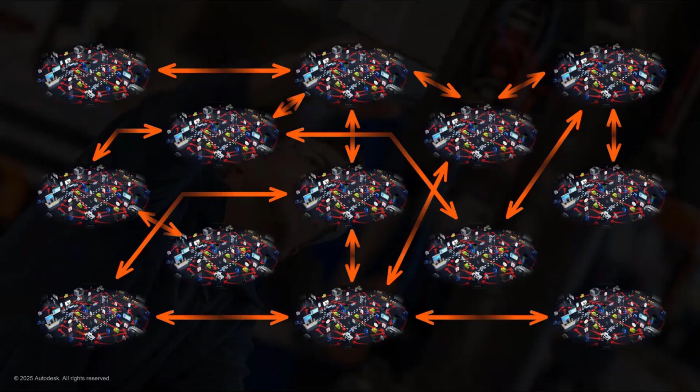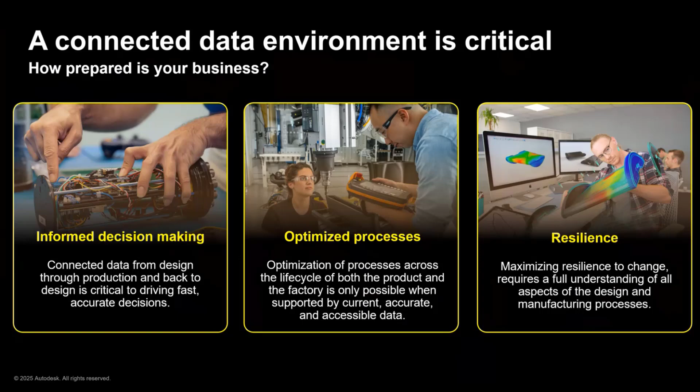We need access to current organized data so that we can connect activity across product design. Connected data will drive collaboration, visibility, and good decision making. Without connected data, we can't make the best decisions.

So now we go to the solution, the Autodesk solution on connected design and manufacturing. The goal here is to improve collaboration between teams by reducing development time, eliminating errors, making manufacturing more efficient, increasing flexibility, and making better decisions and improving collaboration.

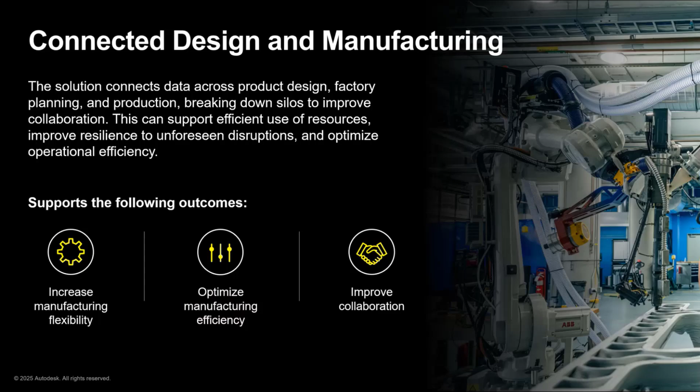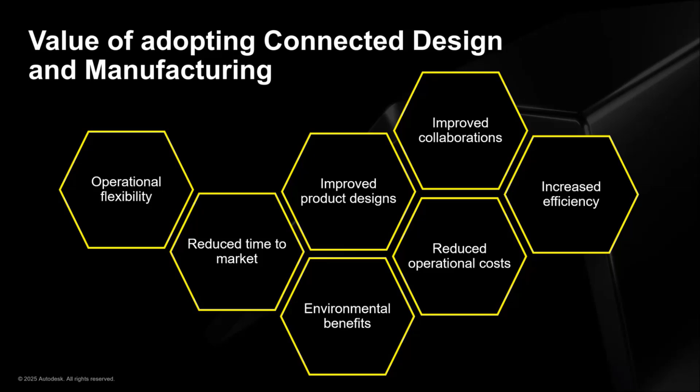Summary on the value of connected design and manufacturing: operational flexibility, reduced time to market, improved product designs, environmental benefit, reduced operational costs, and increased efficiency. Now this is where we get into the more detailed stuff.

So the stages of connected design and manufacturing, as you can see here, let me add a pen. Okay, so the first one here is design data management, this is where we manage our design data, drawings, 2D drawings, 3D models, whatever.

Excel, PDF, this all falls in here - design data. After all our internal things are settled, we already collaborate and manage properly, then we go to the next stage.

This is where collaboration with external stakeholders comes in. For example, you have your own contractor to do all the engineering services, productions, machinists. So how do you collaborate with them? This is the next stage.

Change management for design data - there are multiple scenarios. One scenario is all in-house, so you can manage it on premise. But if it's all scattered location, you probably need to utilize cloud nowadays.

Manufacturing data management, shop floor connectivity - how do you connect from design to shop floor nowadays? In Malaysia especially, the shop floor and the design are usually disconnected. Some of the shop floors I know don't even have internet access, only intranet.

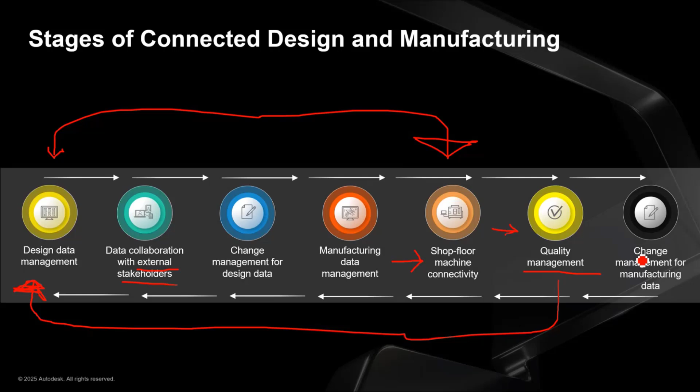And then how do you manage the quality? Let's say there are some defects on the designs - how do we reflect that back in the design data management? If there's no data management, how will it go back to inform that there need to be some changes or amendment on the design data? This also applies to change management for manufacturing data and so on.

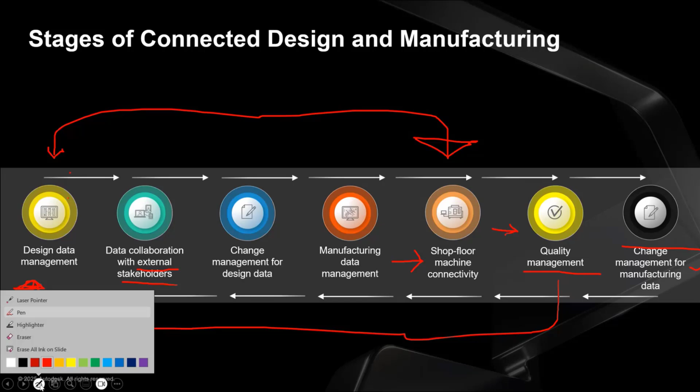Okay. Yes, because here it is all in. Okay.

So the reason why we need connected data is that 80% of business data is never used or never reused, because we don't have the ability to reuse it effectively. If we cannot reuse it, we will have duplicate efforts, outdated design, mistakes in planning execution, and keep repeating this with a lot of errors.

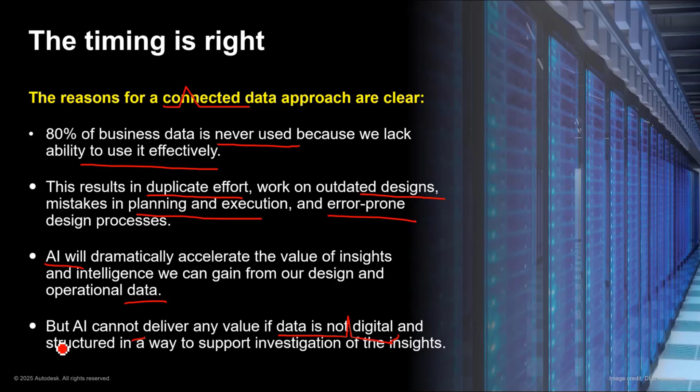AI will help, but AI still depends a lot on data as well. AI cannot deliver any value if data is not digital and structured. So nowadays people are talking about AI, but if your data is not accurate, not updated, or not connected, then AI will not be able to help you to be more productive.

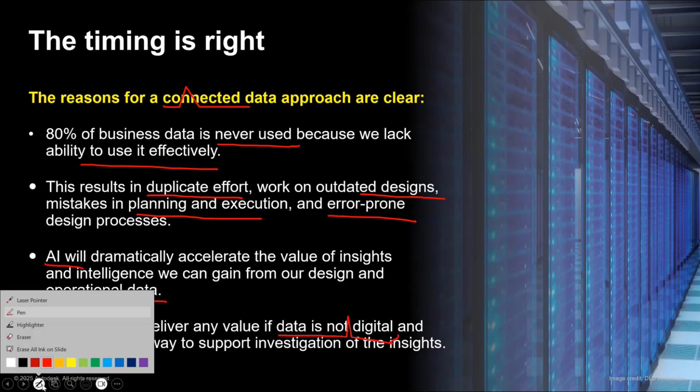So what Autodesk can help with is to connect data, to connect the teams internal and external, and to connect workflows - like from design to engineering to production, maybe to purchasing and all - connecting all these workflows across different teams.

The technology landscape that Autodesk in manufacturing can help with has five solutions. If you're looking at something related to MES or manufacturing execution system, we can look at Fusion Operations. If we're looking at PDM or data management, to collaborate and do minor reviews, we can look into Fusion Team.

If we want to focus more on product life cycle management, this is where things like new product improvements or new product introductions (NPI) fall under. Product data management runs on-premise but with the capability to connect to all the above, which is on the cloud. Vault is the only so-called on-prem solution here, which doesn't run on cloud - it runs on a local server, but with the capability to be configured to connect to cloud if you need to collaborate with external stakeholders.

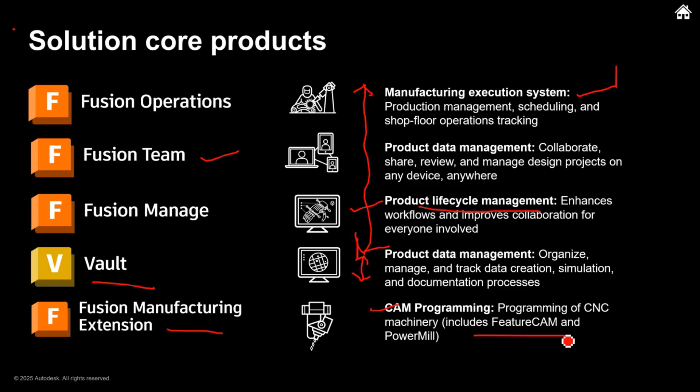Fusion Manufacturing Extension is for CAM programming of CNC and so on. When we put it into the landscape for PLM, we have engineering, Inventor, even AutoCAD is also here - just the logo isn't shown. Let me draw that for you.

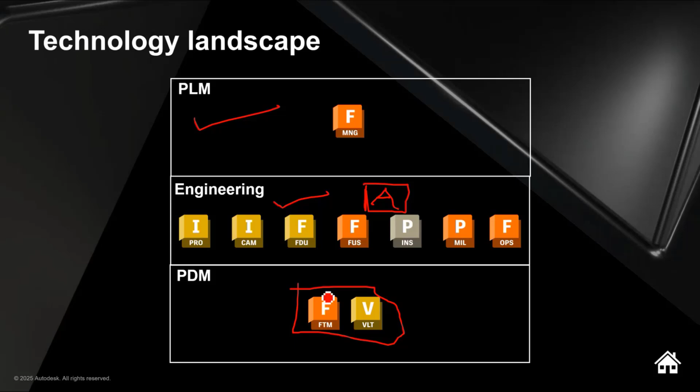Inventor Pro, CAM, factory design utilities, PowerInspect, PowerMill and so on - this is all PDM and PDM related. This covers the technology landscape, stages, and workflow.

Now let's look back at the stages. On the earlier slide, we talked about stages - design, data management - so data stored on network, facilitating enhanced collaboration capabilities.

Why does it need to be on network? So that it's accessible to everyone. It also supports version control and traceability between design and manufacturing data files. Version control is very important.

Imagine now I'm doing the design files, make some edits, save it - probably it's version 4. My colleague opens it up after that, makes some changes, and saves it again - now it becomes version 5. Tomorrow it probably becomes version 6, 7, 8, 9, and so on. Imagine we need to go back to an older version, like version 3 that I created maybe a few days ago.

So here we can go back to whatever versions that we wanted because we can track back. All the metadata of the changes are stored in the PDM data, in this case on Vault.

Automate version control and change requests. Nowadays, if you need some changes and want to ask your team members to do them, what's the method? WhatsApp them: 'Hello engineer, can you extend the bolt to 4mm, add some new holes?' WhatsApp, emails. But with PDM data management, all that can be done from within the platform and it's trackable. You can assign to who, you can set the due dates and so on.

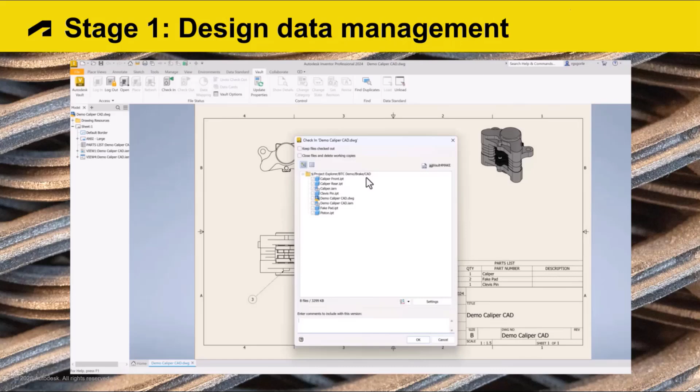Okay, so now let's look at some example. This is on Inventor, but it can also be done on AutoCAD. So let's say we have some CAD drawings opened on Inventor. Let's say initial load to Vault.

So on this platform, I want to load it to Vault, keep it in Vault. Okay, so now I have this. This is a separate, another file, also loading it to Vault.

It can be done simultaneously, all simultaneously. So now you can see here, this is where you can see already released state. You can see revisions, and there are also versions.

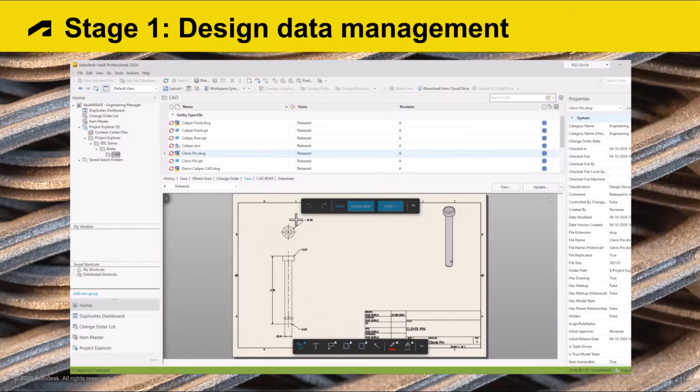So now let's say after the drawings or design has been in release state, in this example probably released to manufacturing, then we realize there are some changes or something need to be amended. Let's say the measurements need to change to a different size, make it bigger a little bit. We give some markups, dimension change, but remember the file earlier has been released to manufacturing, meaning it already has its revisions.

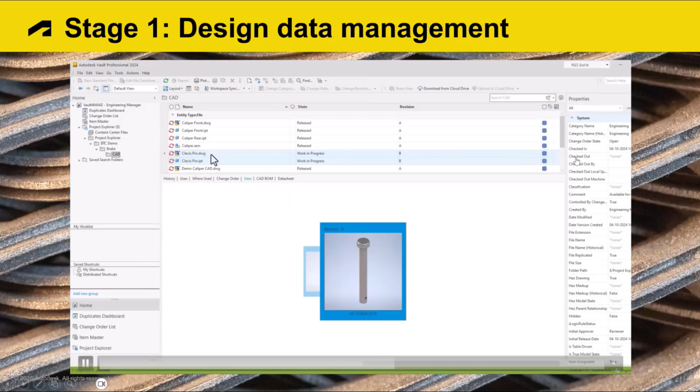So now I'm creating a change order because the file has been released. I'm asking somebody to make the changes. So from revision A, now it becomes revision B because there are already requests to change things after it's been released.

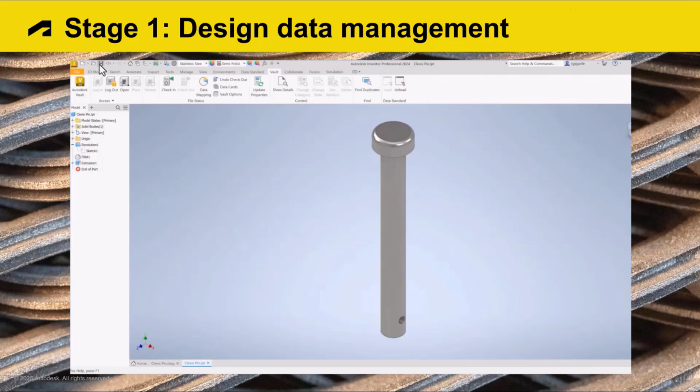So let's say now I make some changes to the models, change the length as requested. Let's say go back, make some changes. After I make the changes according to the markup notes, I just need to save it back or check in that file again into the platform.

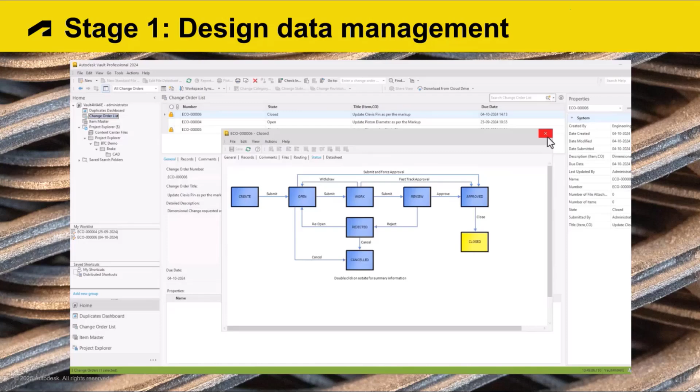Now I go back to the ECO or change order and I can resubmit, and then maybe comment that this is done, the changes are done. So all that is trackable.

Next, when we talk about data collaboration with external stakeholders, this will enable automatic sharing of the current file. So only the current file will be shared, unless we specify older versions or some versions that we wanted to. We can control what we can share, and what the receiver can do—will they be able to edit, or only view?

Okay, so example here. Again, on the platform, this is Vault platform. Let's say I can click share view, of the demo caliper revision A. I can create a name or just rename it 'external sharings'. Once I click share, it will give me a shareable link that I can share to people.

I can view in browser, so the receiver can later copy that link and view it in an internet browser—your favorite Safari, Google Chrome, or Microsoft Edge. You can use it to view the design. By default, the expiry date of that shared view is 7 days, but it is extendable, so you can extend it.

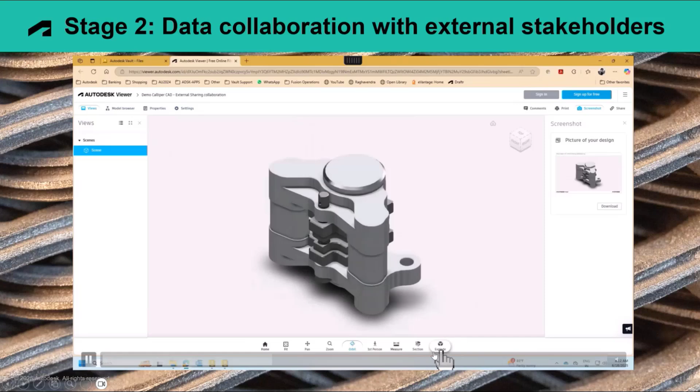Now you can see this is an internet browser, I believe this is Edge. You can see you can view the models in the browser, with all the properties settings. At the bottom, you'll be able to explode the assemblies. Let's say I want to explode that brake caliper to see what's inside—I can do that. I can measure, mark up, zoom in, zoom out, and so on.

And the receiver will not have access to the original files unless you want to send them. So, even though this is on-prem, we can also share it externally. We can depend on email, so we can send that file over via email, or we can send it via cloud.

So in this case, I'm attaching it to an email. You can see the files all sent to emails. Put the receiver details, and it will be sent over, and it will be tracked as well, so the detail of who it's shared to will be available. So this is another platform where we can use Fusion also to share.

So if this is like a joint project, there are people who are not in your office, at different locations, contractors, so they can connect to our design via cloud. We can assign whatever data, file, or project that can only be seen by them, so they can only see very limited or restricted data or project, things that we as the owner allow them to see.

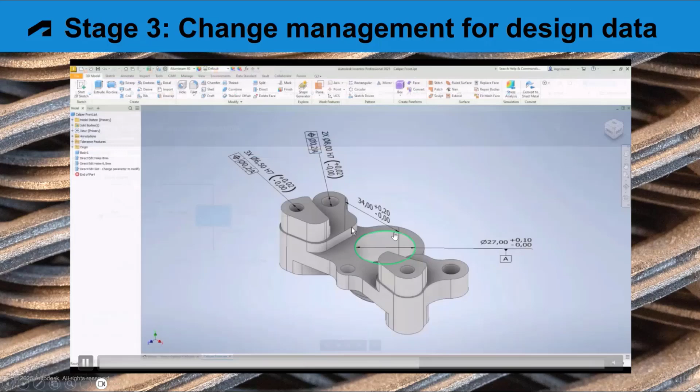So from the dashboard we can see the outstanding work. Let's say it has been assigned, and after the amendment is done, we can clear that assignment.

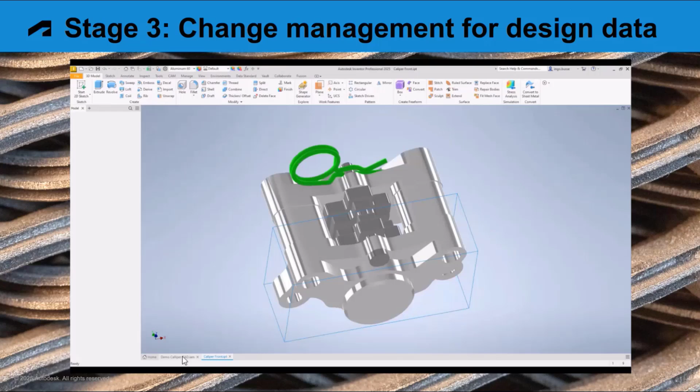So in this case, check if the parameter exists in Inventor, how much effort is needed, how fast the work could be done, how fast the amendment can be done. The assignee who received the task needs to go and check the models to see if the parameter is there, and how long the changes will take. The parameter is correct, offset slot. Let's say I want to comment, all possible within an estimate of 2 hours, for example. So we can respond back to the change order request. That's on change order.

So for manufacturing data management, we can connect Vault to all the CAM applications that we have. For Autodesk, it can connect to PowerMill, FeatureCAM.

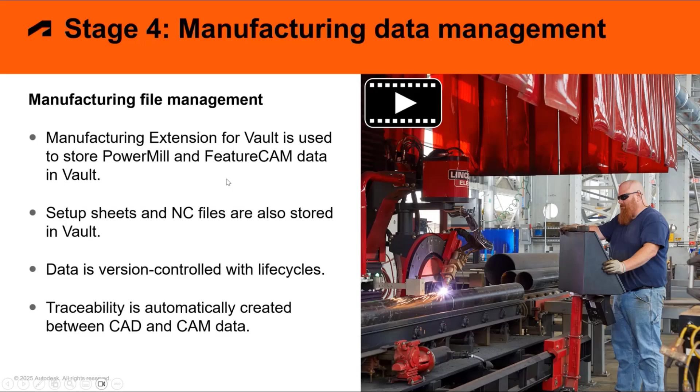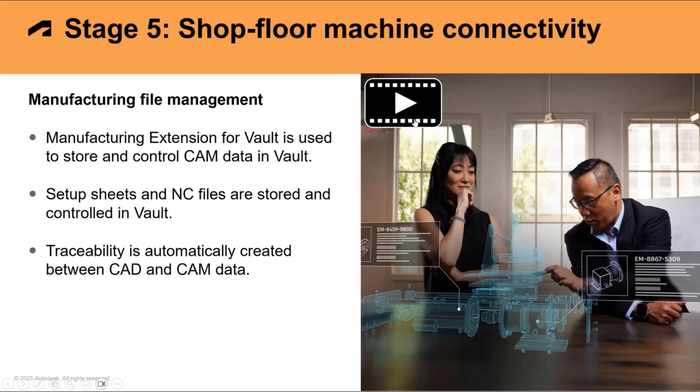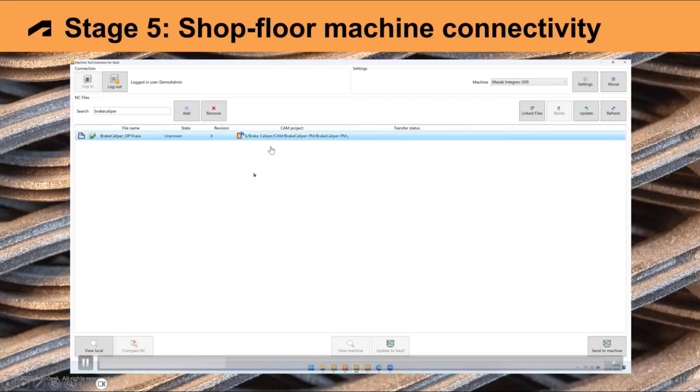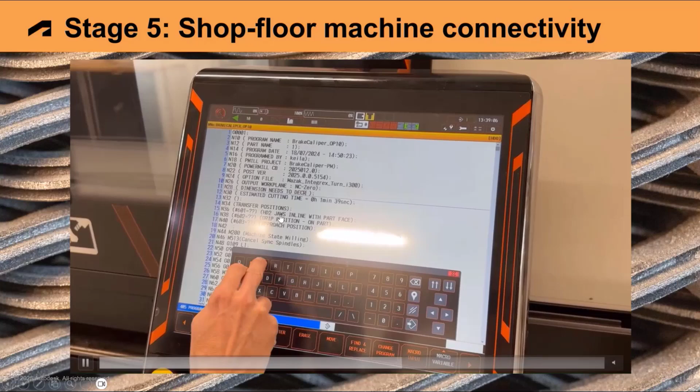From Vault shop floor connectivity, we can also control and view the shop floor information from within Vault. Let's say for brake calipers, I'll fast forward this a bit. So let's say I assign some information, and we know that the NC file exists. From the machine, we can connect to our data management to see what is the NC file, what is the G-code that's going to be used. So instead of using a thumb drive to plug into the machines and run, now we can connect to our data management. In case there are changes, the update can be done from within the data management platform.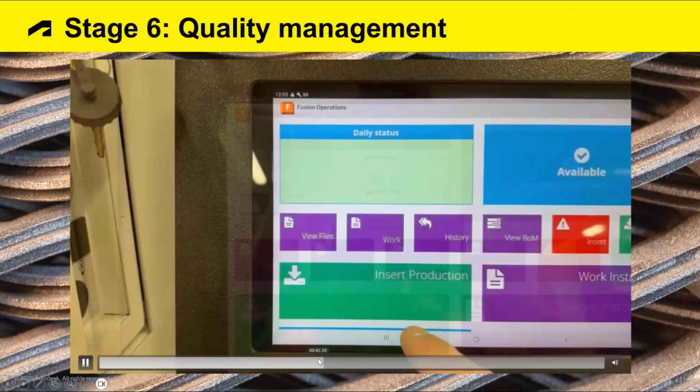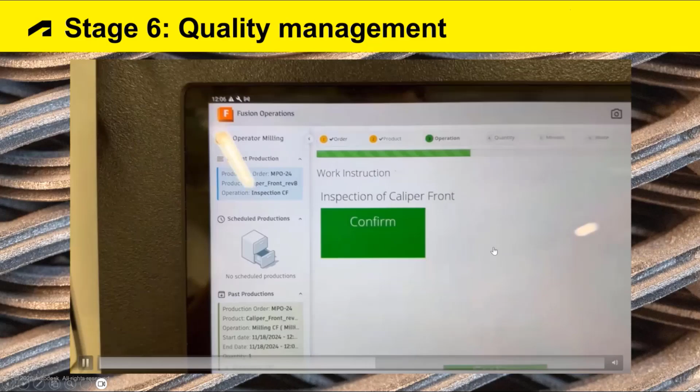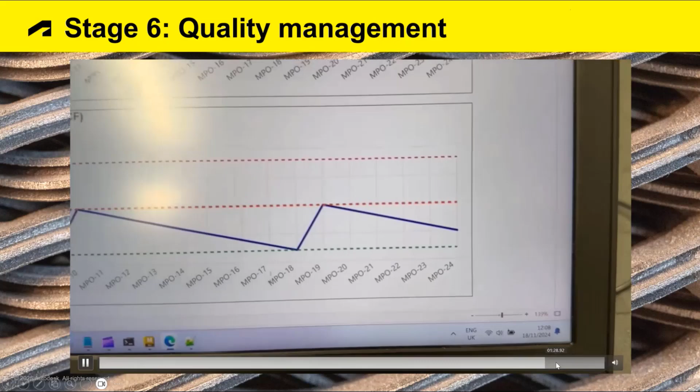For quality management, fast forwarding, we can track quality. Let's say create a production order. Within this date, production number X123 for example, we can detect the material that we use, the material supplier, the machine runtime, what product has been running, what's the quantity, and what is the time taken to complete that. The report of the production itself is available.

Now to summarize all this, I know there's a lot of information.

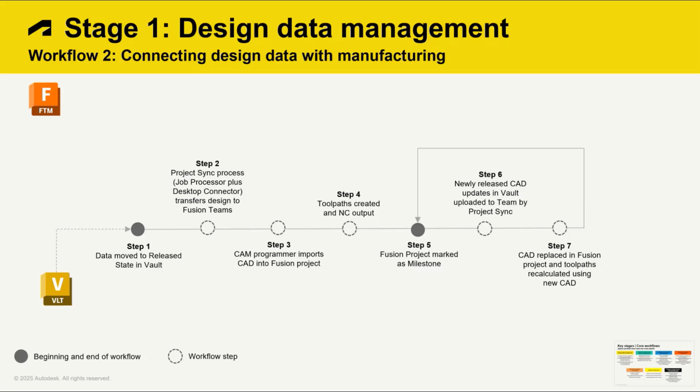Workflow 2 is where we are going to also implement it on cloud. Some of the files will be shared over cloud. Collaborating with external stakeholders: since Vault by default, by nature, is on-premise, we can also collaborate externally, but we can only send or attach files via email. Vault also has its Vault Mobile, accessible via phone.

So let's say for approval, a manager can approve a design or approve changes via mobile. Workflow 2 is where we use Fusion Team Project. So instead of previously using only Vault, now we use Fusion Team. So all the data will be stored on the Fusion Team, Fusion platform. No need to synchronize, as all data is stored in cloud, it automatically synchronizes. So all parties are working in one place.